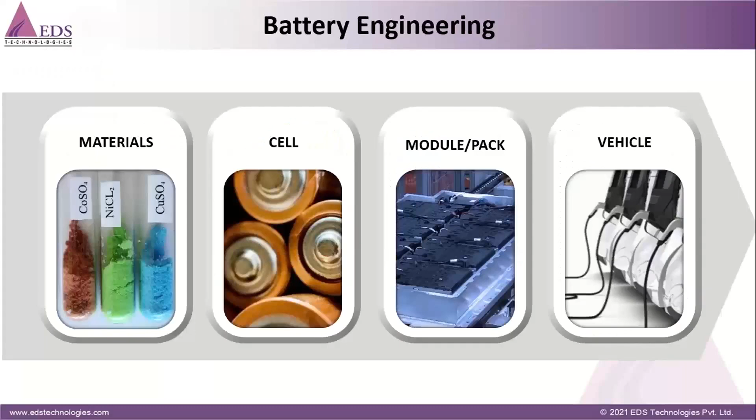Now, these concerns pose risks which should be considered earlier in the design stage itself, especially during the research and engineering of the batteries. By doing so, we can take measures so that safer batteries are released to the market.

Now, the typical battery process creation passes through different phases. Research and development of suitable materials in the initial phase, then comes the assembly of cells, then assembly of combining these cells into battery modules, and then combining these modules into battery packs, and finally integrating them into the final product, which is our EV vehicle.

And at the same time, after integrating them, they should be able to supply the appropriate energy. And at the same time, major points are also how we can reduce cost when we are designing new battery systems.

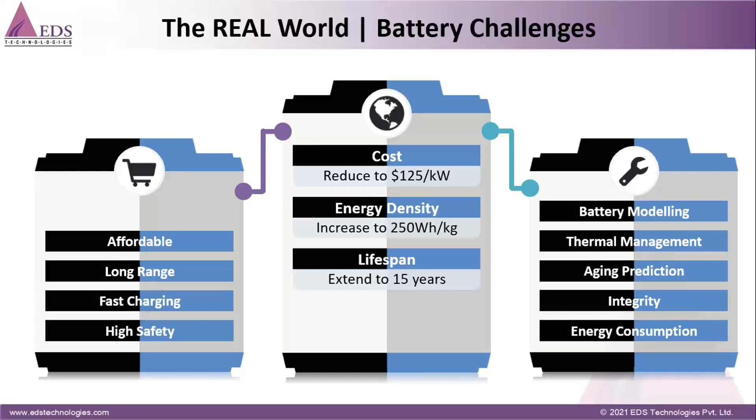How the energy density is providing the required energy, as well as the lifespan. We should have a better lifespan, also better charging as well as discharge capabilities of the batteries, so that we can get good range while using these batteries.

In reality, however, this is not easy, as we all know, because there is a lot of complexity to handle. The making of the right battery for the end product is always a matter of trade-off. Many criteria are there to consider, and these criteria involve influencing factors, as well as many scales and physics involved till the end of the product, wherein the product comes to life and can be integrated.

Taking EVs as an example, customers simply expect their vehicles to be at affordable cost, which is one of the major competition points right now. They should also be able to cover long range, and also be able to charge very fast, and at the same time be safe.

The engineer deals with these challenges like creating reliable models for the batteries to be able to predict and test different solutions for the various scenarios. These are concerned with optimizing thermal management of the battery, and the whole vehicle being able to predict the performance and aging of the battery is also of important concern.

How well will it integrate with other systems, which when integrated with the full vehicle, like be it e-drive, be it your HVAC unit and car electronics, and at the same time reducing the energy consumption of the vehicle as a whole, also plays a very important role.

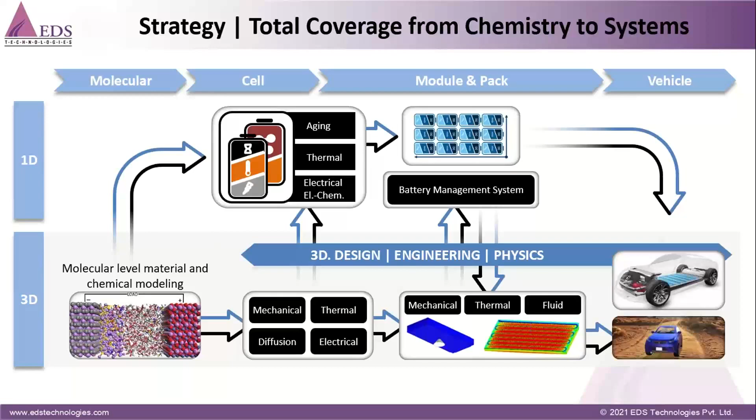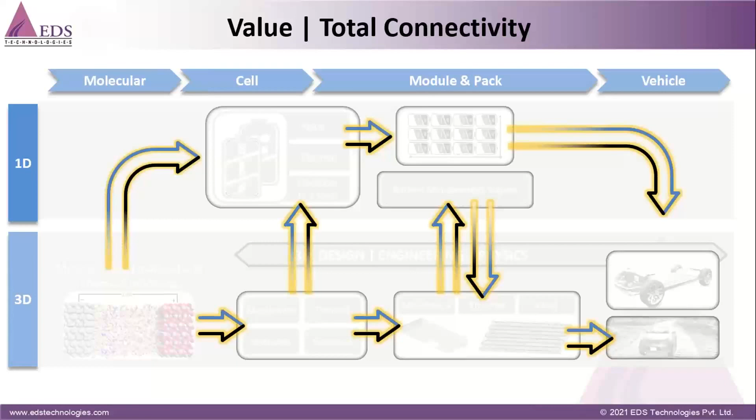And now, having said that, however, the real value is to enable total connectivity between the technologies, and this is achieved very nicely without any issues through the 3D Experience platform. And with the current workflows that I will be showcasing to you all in the subsequent slides, we have already achieved this total connectivity. So this slide now talks a little bit about the digital solutions for the battery system.

So here, with this particular workflow, is how we aim to address your challenges. So firstly, by providing a full range of connected solutions for the engineering problems, be it battery management system design, be it battery module and pack engineering, or on a cell level battery cell engineering, or be it battery systems modeling, all the way up to full vehicle integration, including electric drive as well.

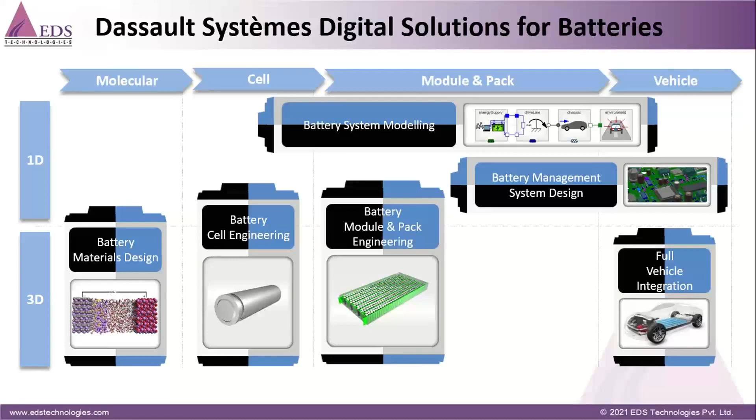So this slide talks a little bit about battery materials design, wherein one of our brands, BIOVIA, provides Materials Studio, which can do enhanced research and numerical simulation for materials, specifically for battery materials, such as electrode properties and intercalation, solid electrolyte interface characterization, and electrolyte characterization.

Then the next area to venture with respect to the battery system modeling is the 1D simulation. So one of our brands, Dymola, is our 1D system modeling tool. Now with the Dymola 1D system modeling tool, the user can easily build the system model or 1D model for the battery system.

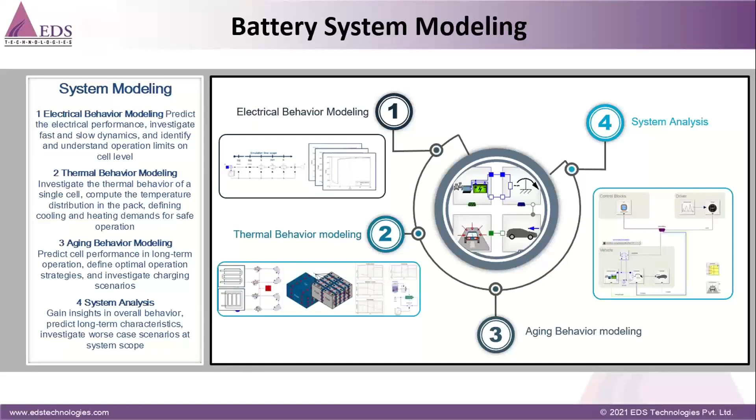And Dymola provides the battery library, which makes it easy for the user to build their own battery system. It has all the necessary functionalities to analyze the battery system, such as battery thermal behavior, aging behavior, drive cycle simulation, so on and so forth.

So coming to battery cell engineering, firstly, I'm going to touch base with how on a single cell level, whether it's a detailed cell or a homogeneous cell, we can carry out different physics simulations like safety, thermal, etc. And then how these can be cascaded to battery module and pack, and finally to full vehicle integration.

So the ability to engineer safe batteries lies first and foremost in understanding the failure mechanism, how the battery might fail. Those can be best observed at cell level when we are doing research with respect to the battery, where all components of the battery are represented in detail and processes within the cell itself are simulated to get insight on how the battery responds in different situations.

So some of the methods here involve considering the multiphysics. By considering the multiphysics on a single cell level, we can reveal how the combination of electrical, thermal, and mechanical loads affect the cell performance as well as the cell safety.

Then by using the Resolve in 3D app, we can understand the failure mechanisms by looking inside the cell. If a short circuit is happening, what's exactly happening, what is the state of charge, or how the battery is discharging, what effects it is having, and by ensuring safety.

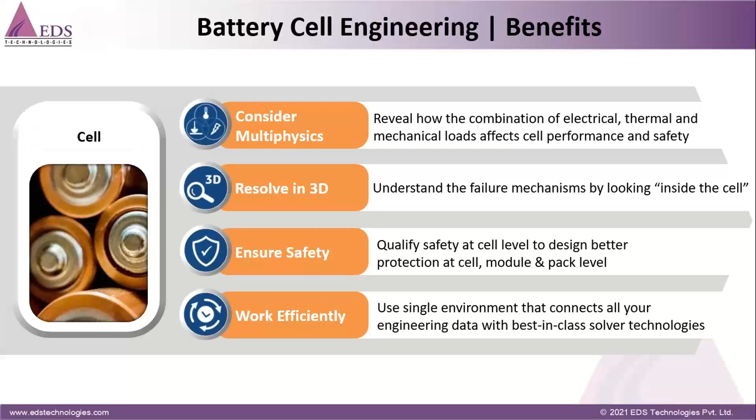By combining all this, we can work efficiently by using a single environment that connects your engineering data with the best-in-class solver technologies that are completely embedded and available onto a single platform. And not only that, it also makes the learning curve much easier.

Coming to battery cell engineering, the full scope of battery cell engineering is very huge, and hence we have grouped them into a few categories. So we have categories like physical design definition, which involves the initial design phase.

Then we have electrochemical performance. Then we have thermoelectrical losses, thermal management, strength, stiffness, durability, safety, degradation, aging, reduced order modeling, and so on and so forth. So firstly, I'm going to touch base with the thermoelectrical losses.

So what are the benefits of thermoelectrical losses? Whenever I'm doing any multiphysics simulation or any multiphysics study, two points I will be looking at as a user: what is my return of investment, and second, how easy and good it is for me to use these multiphysics simulations so that I can come up with a most optimized and better product into the market.

With the thermoelectrical losses, it allows me to predict the energy losses in the battery cell, and it considers all the physics in a coupled simulation. It can be thermal-mechanical, electrical-mechanical, or individually thermal, electrical, as well as mechanical.

And with the availability of the 3D experience platform, I can connect geometry and simulation modeling on a unified platform. It also gives me the freedom to execute these simulations onto premise or onto cloud HPC, depending upon the user's use.

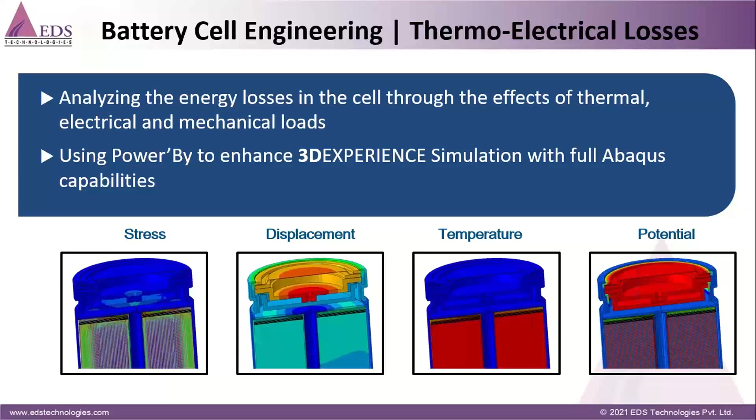We can enhance this simulation with full Abaqus capabilities onto the 3D experience platform by leveraging different tools and roles that are available, and by combining these different roles, be it static or explicit dynamics, along with design of experiments, or even topology optimization, or even fatigue study, to come up with the best product with a good life as well as shorter product development time.

This slide, which is displayed, shows you a workflow for the thermoelectrical losses. So in step one, we have a native or an orphan mesh or a geometry that can be imported onto a 3D experience platform.

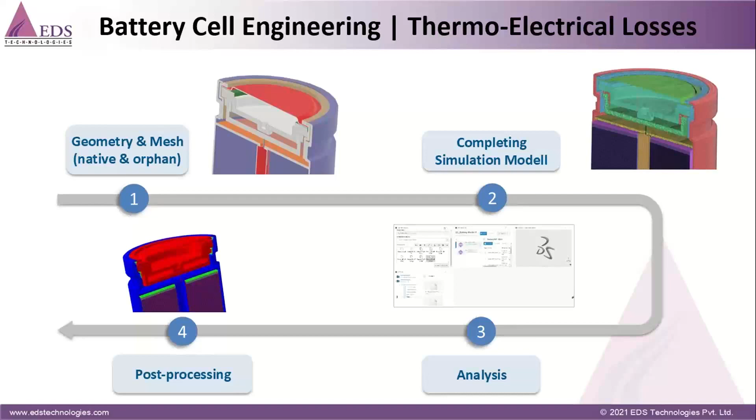Then we pre-process the model using the pre-processing roles that are available onto the platform. Then we submit it for the analysis, and then we do high resolution post-processing using the tools available onto the 3D experience platform. We post-process it, make any changes required as per the constraints and objectives, and finally sign it off.

Then coming next is the strength, stiffness, and safety, which is of number one priority these days, since we already discussed how batteries are being handled in a completely different environment and much more harshly as compared to a decade or two ago. With the strength, stiffness, and with the full Abaqus capability available, we can assess the structural integrity.

We can subject these batteries to external or state-of-charge induced mechanical loads. All these are very easily available, and the capability is very high to better understand how the state-of-charge induced mechanical loads behave onto given batteries.

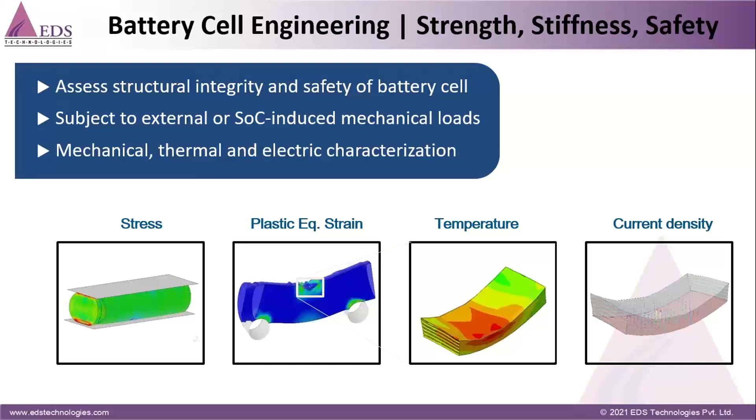Mechanical, thermal, and electrical characterization can also be studied. This slide talks a little bit about the workflow for strength, stiffness, as well as safety.

I can import geometry or mesh of a single cell, and then induce a state of charge load, which we usually call predefined loads. Then we can see if there are any internal short circuits, and finally we can see how the strength and stiffness affect the expansion or internal short circuits on this battery by performing different studies like axial compression, radial compression, 3-point bending, as well as impact studies, and so on.

Now, coming to battery cell engineering, we all know that cells can be of different types. It can be cylindrical, prismatic, or pouch. For study and reference purposes, we are considering here a cylindrical cell.

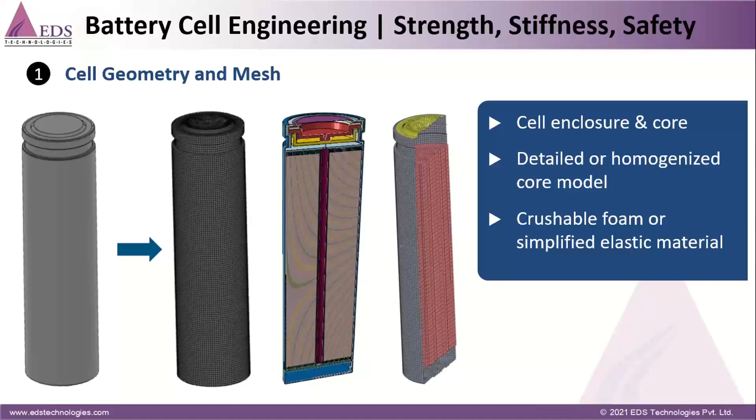By taking a single cell, we can either go with a homogenized core model to simplify our analysis in order to understand how the battery behaves with respect to strength, stiffness, or safety, or we can have a detailed jelly roll model wherein we can input all the details of the cell that are required. Once we build the model, we can...

We can go ahead and check whether a battery is charged or discharged, and because of charging or discharging, how the core material is expanding, specifically during lithiation and delithiation, and whether the thicknesses of the anode and cathode are changing, and if so, how much they are changing. All this can be studied.

The charge-induced volume expansion of a jelly roll can now be implemented and simulated with Abaqus. Abaqus has the capability for the user to study the volume expansion of a jelly roll inside the battery because of charge induction.

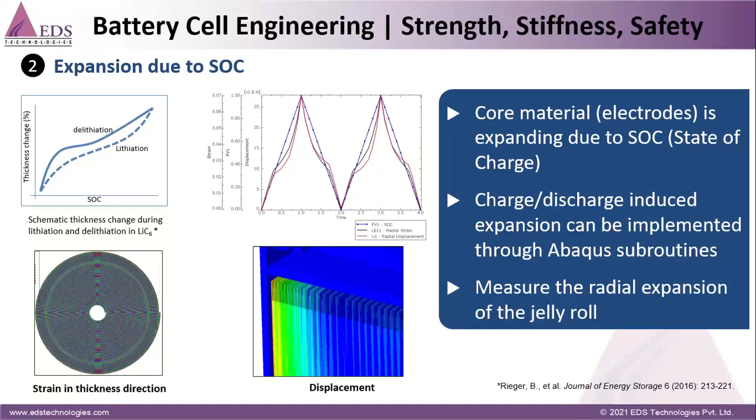And these are some of the demos captured here regarding strain in the thickness direction, as well as displacement because of state of charge.

Co-simulation can easily treat this multi-physics behavior with minimal modeling effort. So not only are we trying to bring all this solution onto a single platform, but also the effort required to model these kinds of complex batteries in detail is minimal.

We can also leverage the two solvers from Abaqus: Abaqus Standard, which helps resolve the thermal-electric-displacement in a critical area of the battery, and Abaqus Explicit solver, which gives the large deformation of layers from the global cell deformation. We can leverage these different solvers in the form of roles available on the platform, combine them, and study different failure mechanisms.

Also, co-simulation allows passing information from the global deformation at each increment. Coupled thermal-electric-displacement analysis, if required, can simulate only the critical areas in the battery. On top of that, we can observe temperature and electric potential or current as a measure for short circuit onset. So all these different studies can definitely be studied.

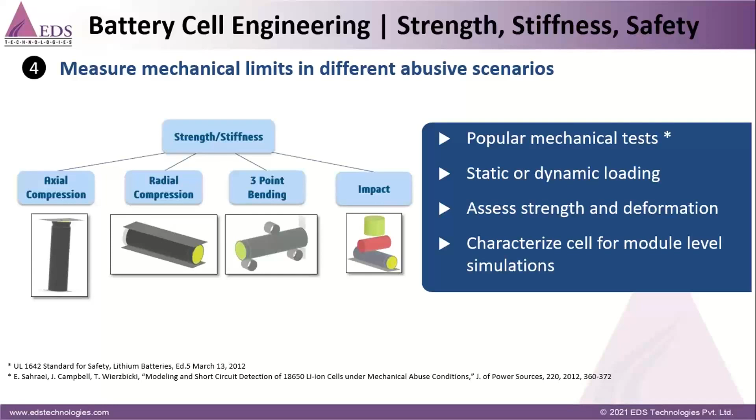Be it axial compression, radial compression, 3-point bending, or impact, we can characterize the cell for module-level simulation using this. These are some examples of the axial compression test that we have already carried out.

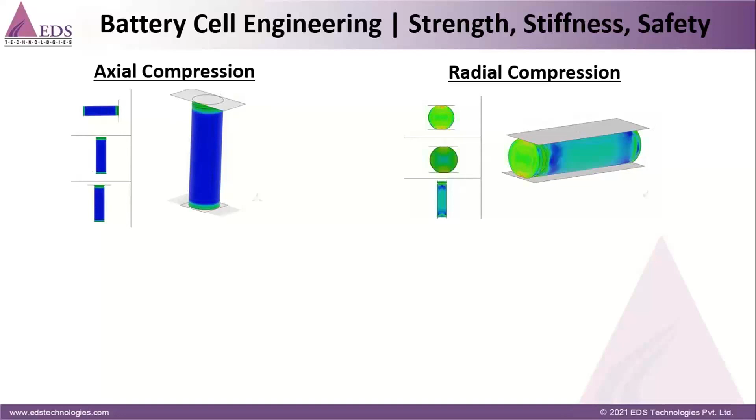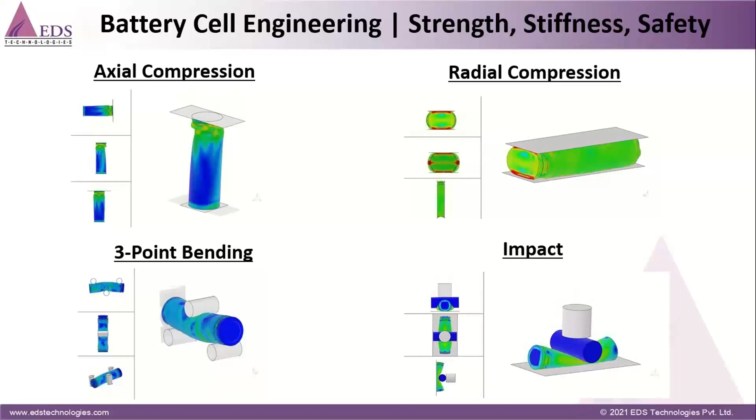Then the radial compressions, then we have 3-point bending, as well as impact loading, to see how these cells are behaving, where the stresses are getting accumulated, and if we are having a lot of hotspots, how we can change it.

Now, coming to the benefits of strength, stiffness, and safety, obviously by incorporating this workflow, it helps the user to assess the structural integrity and safety of a battery cell completely in a virtual environment without requirement for any physical tests.

And we can cover both linear as well as non-linear, implicit as well as explicit behavior, including contact and damage. So all these can be included, and by including damage, we can even predict the life of a given battery.

Minimum modeling effort is available to resolve multi-physics phenomenon, be it electrical analysis, thermal, or structural, and for all this, it's a single solver. So by using the single solver, these different studies can be achieved very quickly and very effortlessly.

Now we all saw what different studies can be done onto a single cell or a single battery. The next step would be to cascade those studies onto a battery pack, or the battery module engineering. So again, in module and battery pack, structural integrity is the number one priority to check as a product.

And our simulation tools are widely used for this purpose already. Many of our customers have been using this.

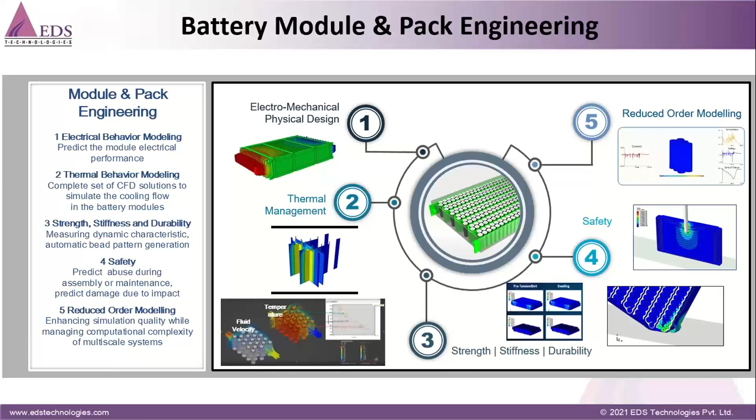Now, thermal characteristics is another important behavior that the battery module or pack designer is interested in. With the reduced cell modeling technique we previously mentioned in cell engineering, the user can model structural analysis for safety, such as drop analysis, nail penetration analysis for the module, or even for the battery pack level. The subsequent slide is going to talk about that.

Now, the current picture shows the thermal talks and showcases a bit on thermal management. This picture shows air cooling simulation results with different cylindrical cell packing configurations. As shown in the slide, the user can easily find the fluid velocity and temperature under cooling by playing around with different pack configurations.

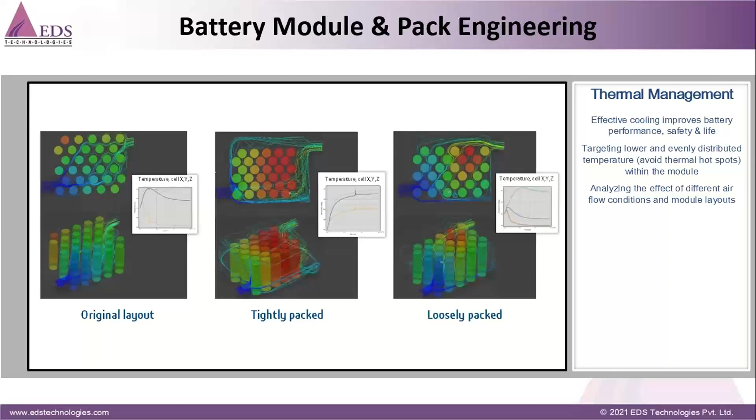So you can have an original layout which is not very tightly packed or not very loosely packed. Then you want to see how it behaves when the cells are highly tightly packed, or if they are loosely packed. So all these configurations can quickly be assessed and studied.

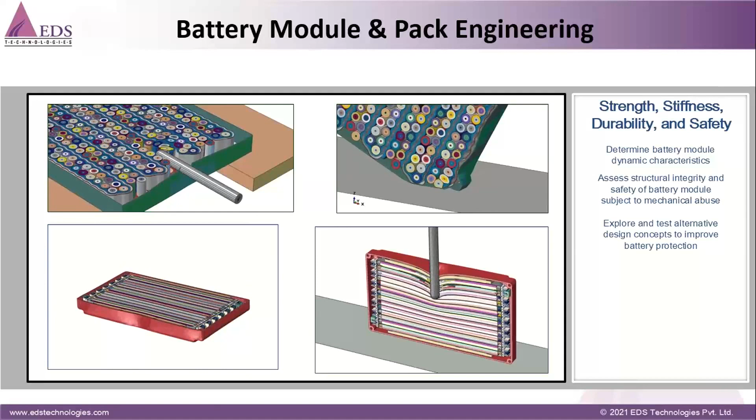So with the reduced cell model, the user can easily see individual cells' behavior accurately. On top of that, by cascading this down to the battery pack, we can show the nail penetration and drop analysis for cylindrical cell type as well as pouch type batteries.

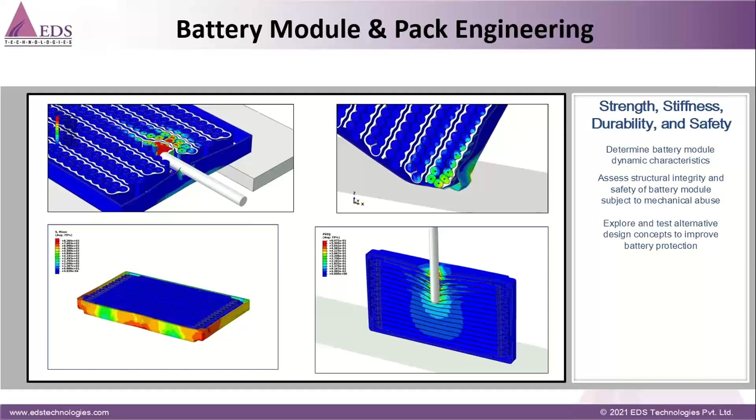So the top two images are with respect to the cylindrical cell, which have been combined to form a battery pack, whereas the bottom two slides talk about the battery pouch. So another example of the drop analysis.

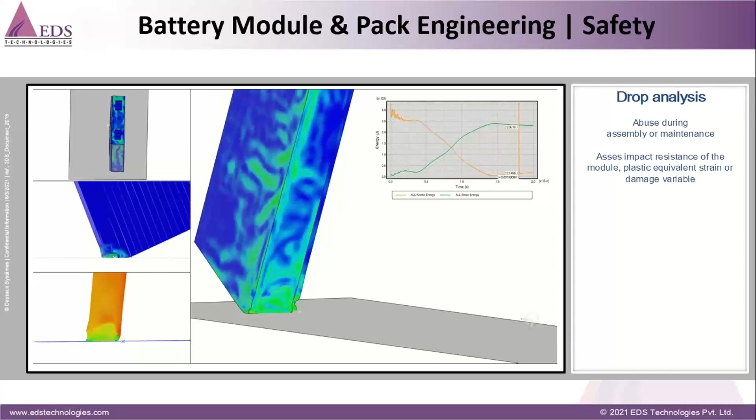So these abuse scenarios can occur during installation, maintenance, transportation, or assembly. These kinds of studies help us assess the impact resistance of the module, and also help us assess the plastic equivalent strain or the damage variable.

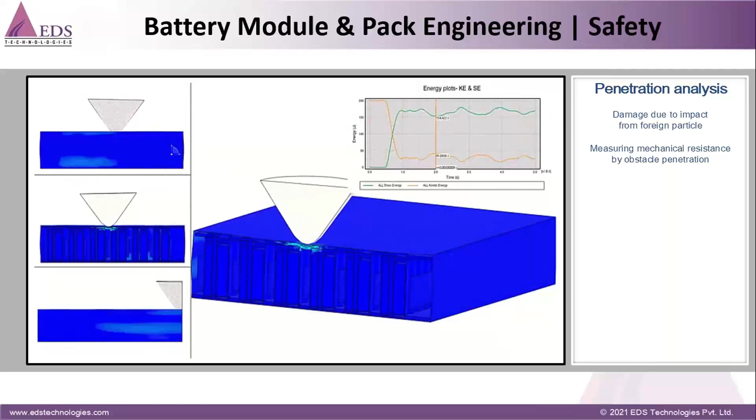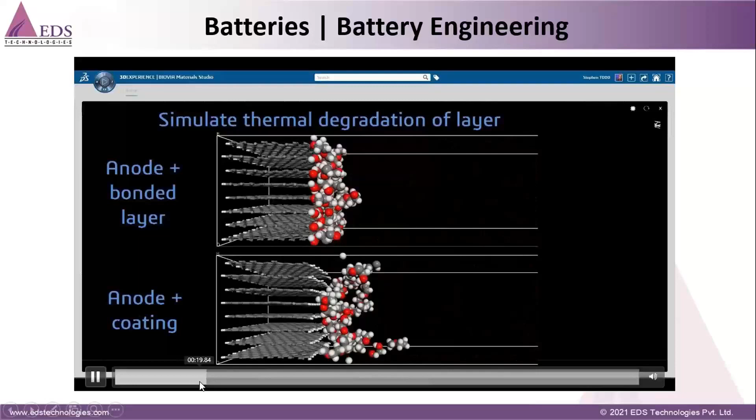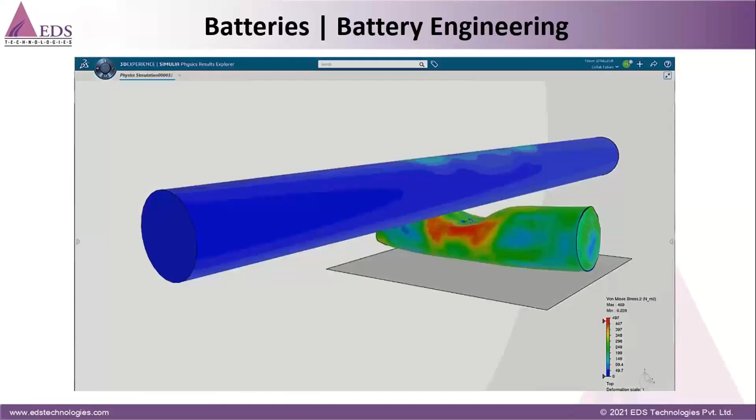Then these are the impact analysis. This small video talks about the battery module engineering, both about the penetration as well as thermal management. So we can see the battery surface temperature, how it changes when it is being heated or when the battery is started and is supplying power. These are the penetration analysis on a battery pack level.

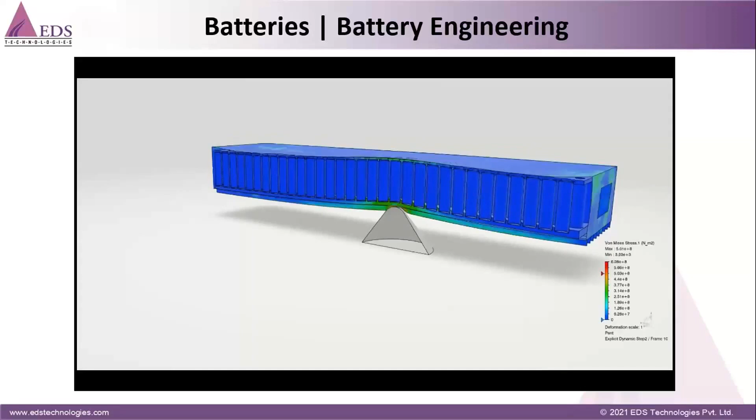Coming back to the electric powertrain, these can be modeled in the form of 1D to see what is the output of the machine, how the electric drive is behaving, and whether there are any options for me to go ahead and optimize it.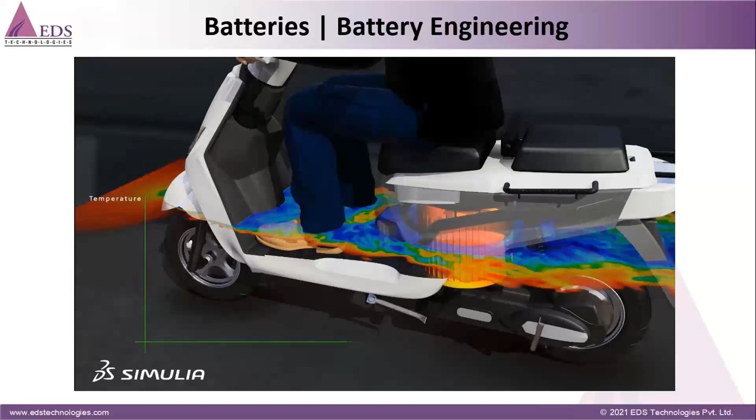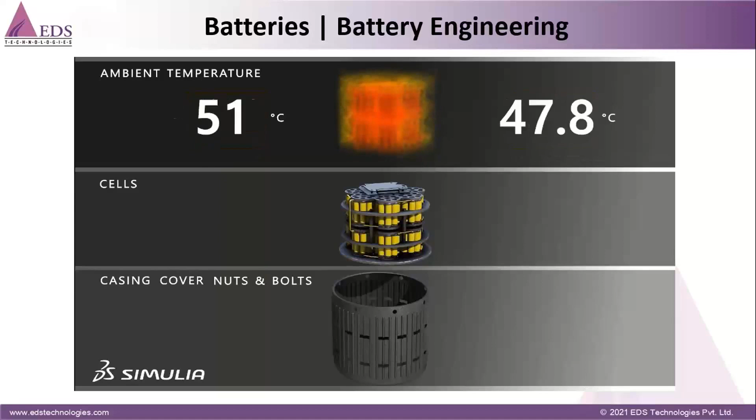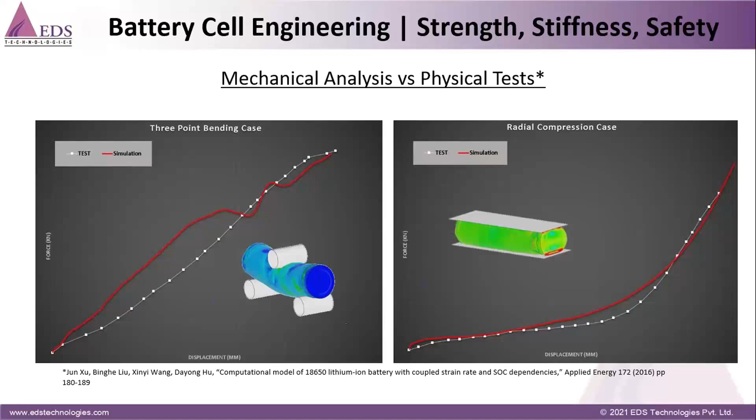This slide talks a little bit about correlation with mechanical analysis as well as physical test. We have considered the 3-point bending case as well as the radial compression case. In both cases, we can very clearly see that whatever has been validated through the virtual simulation closely resembles the physical test or actual test, thereby proving that the solutions we provide for battery engineering are highly accurate, and we can definitely validate and sign it off virtually without the need for multiple physical tests.

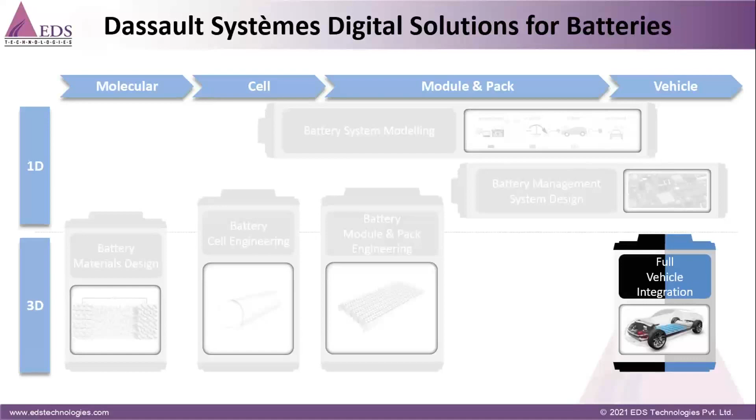Now coming to the next session, or the final part of today's webinar, where we talk a little bit on the full vehicle integration. So when it comes to full vehicle integration, like previously I said, three major categories we have categorized for the studies that can be done.

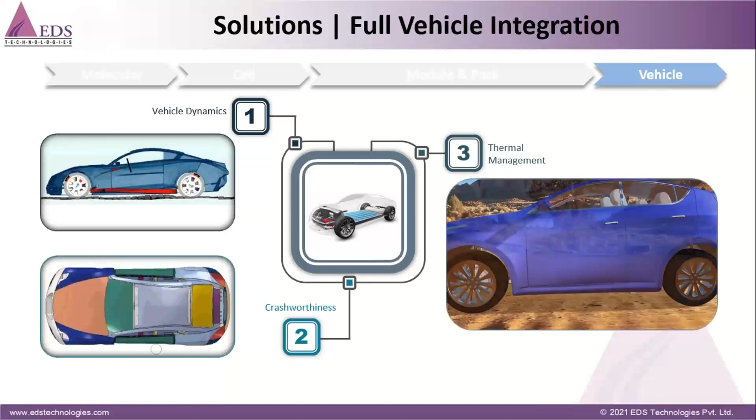One would be the vehicle dynamics, be it multi-body simulation for whole vehicle to characterize the ride and handling, or the cabin comfort for the passenger, or how the electric drive is behaving. This whole workflow comes under vehicle dynamics.

Then we have crash worthiness, an advanced explicit dynamic solver for simulation of rapid abusive events like crash, be it rollover, or what if an external obstacle is coming and trying to penetrate. So all this can be done through the crash worthiness workflow.

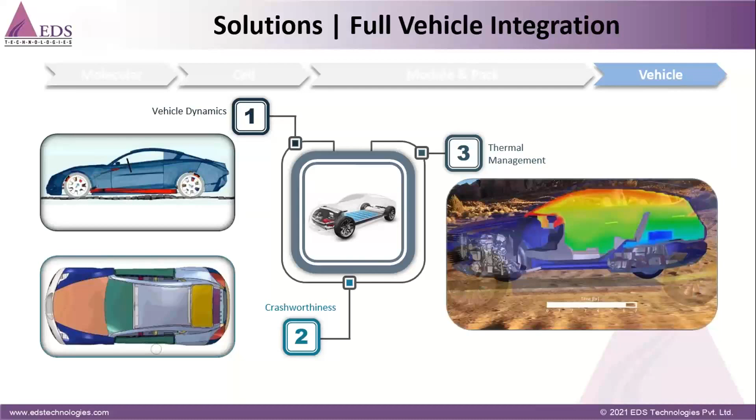And finally, the thermal management, which not only includes Abaqus regular structural thermal analysis, but apart from it, CFD solutions also can be incorporated to simulate and assess thermal management in the context of the full vehicle. For example, we can consider simulation of thermal soak for a full vehicle, which will help us understand the impact of structure conduction as well as the cabin greenhouse effect for better battery temperature and for a better driver or pillion experience.

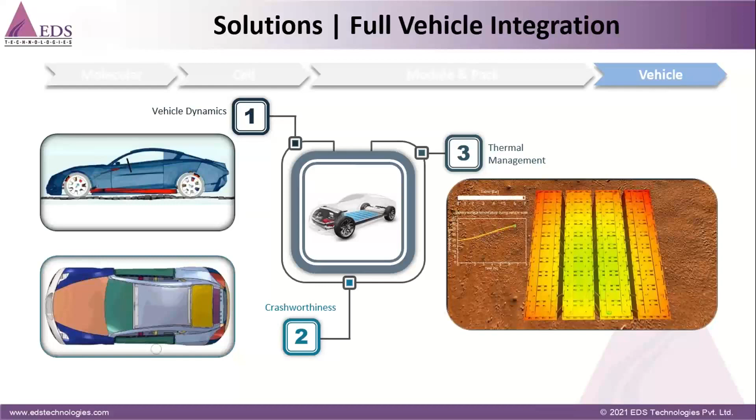So all these are the different studies that can be integrated from battery level all the way up to the vehicle level to come up with a better optimized design and also bring it faster to the market.

Now, how is Dassault Systèmes, or how will we be helping for you?

How will this all fit for your next challenge?

We initially did say that going digital, going electronic, is the way forward, as it helps us reduce cost, be it in physical testing or material saving. But at the same time, we can validate all these different kinds of studies virtually.

So to summarize, the way we believe we can help you be successful specifically in the EV segment is by mastering the battery engineering challenges, which is now completely based on three pillars: foundation, strategy, and core.

The foundation here is the 3D Experience platform. It's a collaborative environment to connect data, connect people, and connect technologies. And then comes the strategy.

We develop our solutions to solve industry business processes, like point-wise solutions, which can again be combined onto our foundation, the 3D Experience platform. This in turn helps you manage more efficiently the complexity of battery engineering and the interconnectivity of all related systems you come across.

And finally, the core. Based on full coverage of best-in-class technologies, we provide for all scales and all physics. In the core, we have electrochemistry, materials modeling, electromagnetics, structural performance, behavior modeling, and so on.

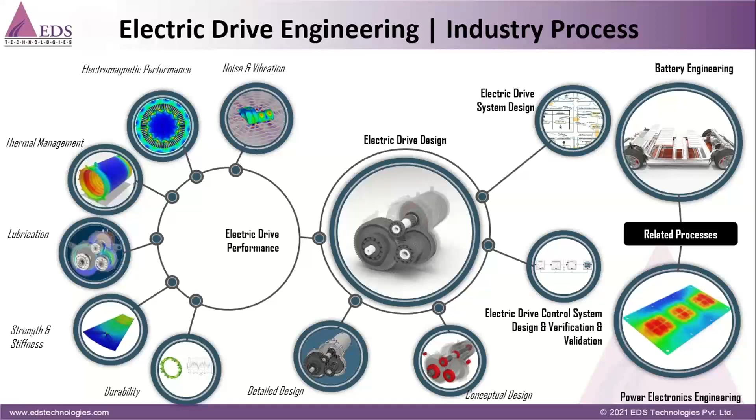So we'll go quickly through a few workflows, the first being electromagnetics. Achieving the highest possible power density requires an optimal electromagnetic design, which is a must, and performance is directly related to the overall driving experience and efficiency of the vehicle.

Keeping these things in mind, the Dassault Systèmes electromagnetic solution allows engineers to analyze electric machine performance. It also helps analyze efficiency, dynamic forces, torque, as well as thermal losses, in order to drive the design of the electric machine.

This briefly explains the operating scenario: electromagnetic simulation with KPIs like torque, flux, induced voltage, then combining them with structural FEM, then doing a design exploration, or design of experiment, to come up with the best design in the shortest possible time. Then we do a design review, and finally we virtually sign it off.

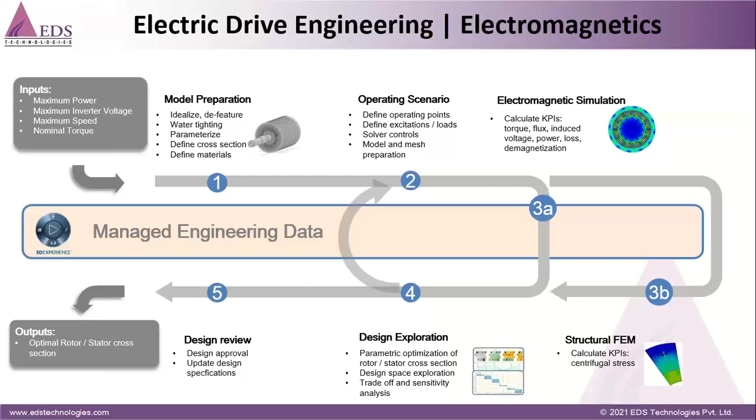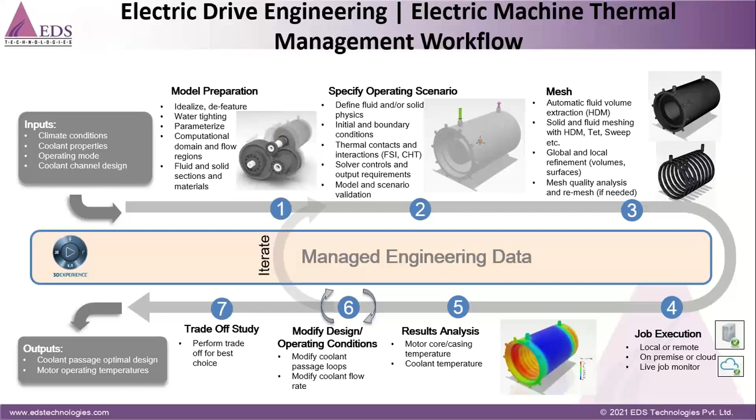By reducing the noise and vibration, it definitely improves cabin comfort, and by doing so, the durability of these coupled systems also increases, thereby increasing warranty as well as the life of a given component. Then we have the noise and vibration workflow, which is a good example of different levels of detail at different stages of the development cycle. You can include this workflow at your initial design development phase itself, or even at a later stage.

By including this at different stages, we have a better chance of getting better designs in a shorter amount of time. This slide shows the most advanced version of a noise and vibration workflow that we, as well as Dassault Systèmes, have come up with.

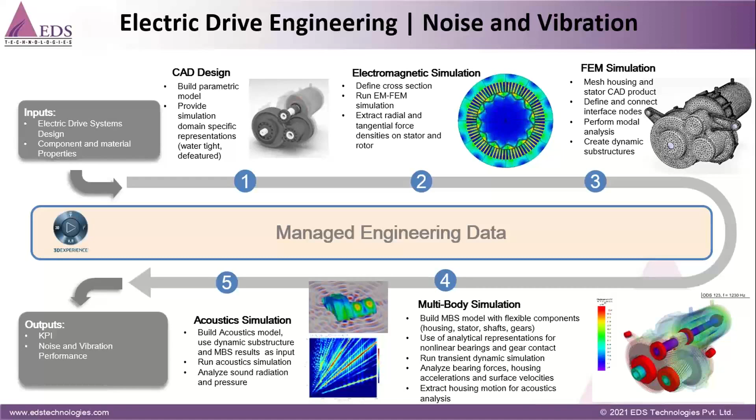The simplest version would be just using Abaqus. If you want to simplify this, you can just use Abaqus in the noise and vibration simulation environment. Even that capability is available.

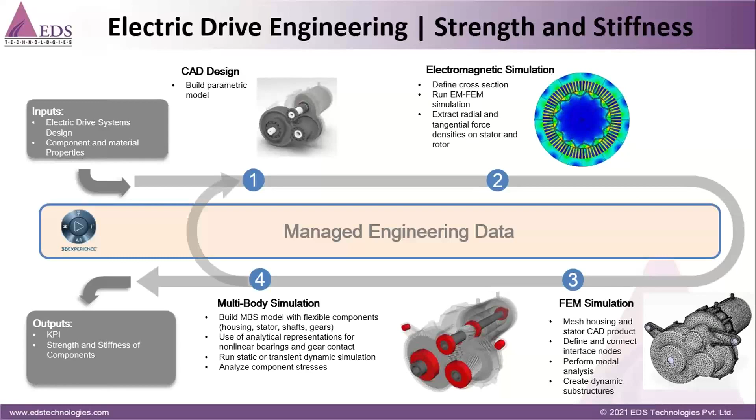Then there's also the durability workflow, which we briefly spoke about, wherein we can include fatigue analysis before we sign it off. So once our electromagnetic simulation or the regular structural as well as dynamic simulation and multi-body simulation is done, before we sign it off, we include fatigue analysis with multi-axial strain-based fatigue methods to identify if there are any durability issues, if a component or an assembly of components is going to fail, and make modifications necessary to increase the durability and the life of that component, and finally sign it off.

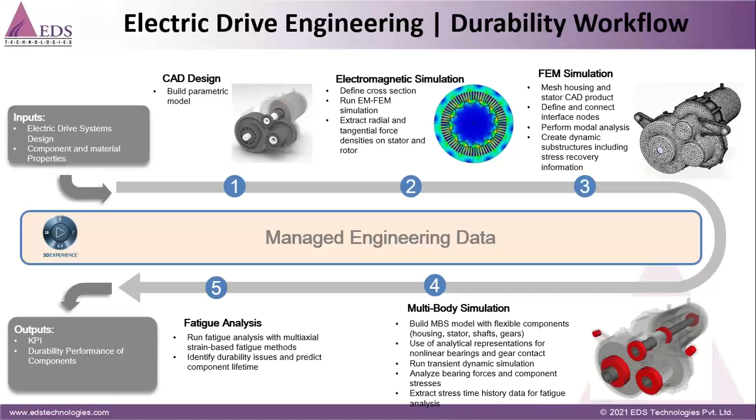Then comes the gearbox lubrication, which is also of utmost importance, because we know that the electric machine drives a gearbox, and the high rotational speed that this gearbox has makes lubrication critical to system efficiency and lifetime. Multi-phase simulations can be incorporated here, and they can help you minimize the size of the electric drive by optimizing the volume of oil necessary to properly lubricate the gearbox moving parts. Because of this, the gearbox performance can be improved by minimizing the mechanical losses induced by the lubricating oil.

So these different types of studies show what volume of oil is required and how we can reduce it, so that the rotational parts do not have any mechanical losses. Examples would be oil splashing, lubricated surfaces, and oil pressure. All this can be incorporated into your workflow in order to better understand how the gearbox is behaving, how the lubrication is behaving, and based on that we can modify the simulation conditions, and finally modify the design and reduce the mechanical losses and come up with a much better gearbox along with the gearbox lubrication.

Now, coming to the summary: what are we trying to achieve through this electric drive engineering process or industry process experience? One thing is we will achieve high power density while managing cost and supply chain risk, because we are carrying out all these different studies on a single unified platform with less effort needed for modeling. At the same time, this is going to help us save development time and cost by a third or even more.